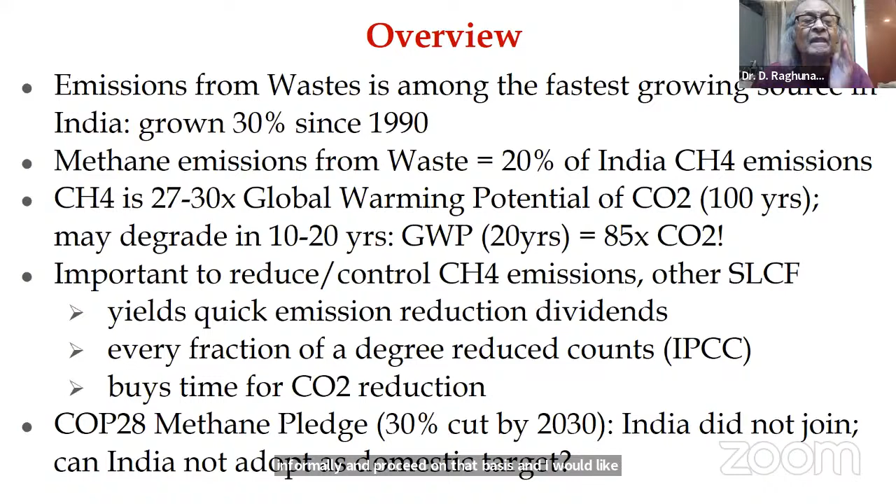So the broad status in India with regard to waste treatment is — and I think our panelists would agree with me — that currently waste handling and treatment is rather poor, is quite unregulated despite the existence of various rules and laws, and neglected, even in the large metros where there is some capacity investment. So the conditions in smaller towns and cities may well be imagined. Solid waste data is quite uncertain, there's some debate about these numbers, and it's probably an overestimate anyway, as stated, which government agencies tend to do. We are collecting roughly 70% of waste generated. Maybe 20% of that is being treated, and the rest simply lands in what are called landfills, but are really dumps in unhygienic conditions, polluting air as well as water through seepage, causing other health hazards through the emissions there. You can see the methane seeping out with flames coming out, etc.

The sewage treatment capacity is only about treating 19% of sewage generated. But if you look at capacity utilization, that's only about 72% or so. And therefore, the net amount comes to only about treating 13% or so of the sewage being generated. So much work is needed in the metros, and even more in the tier 2 and tier 3 towns.

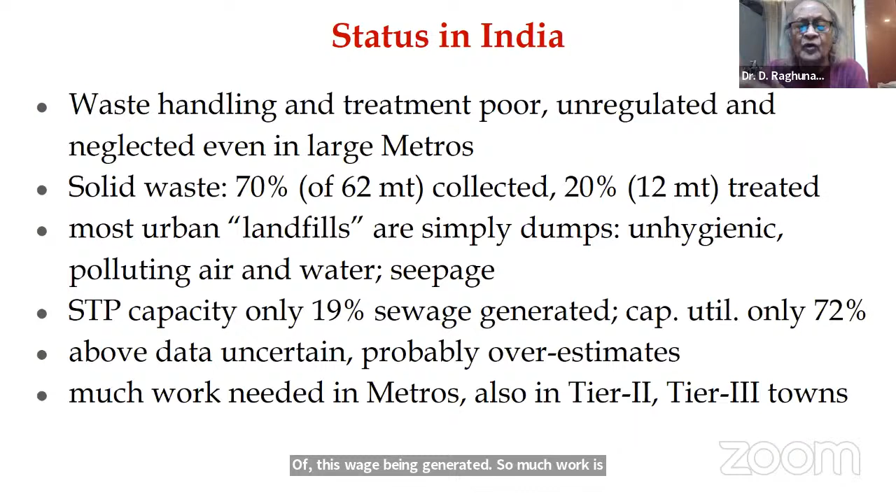So the issues, I think, are the technology used both in solid waste as well as in sewage treatment, I think, are quite outdated. They're very far from international standards.

We need to address this problem as a multidimensional approach. A common approach that we are following in our approach paper, etc., is we are looking at these issues as problems which can yield multiple benefits or co-benefits. Now, the co-benefit argument is it depends on your perspective, what you consider to be the main benefit and what you consider to be the co-benefit.

So it's very useful to think of maybe not benefits and co-benefits, but multiple benefits. Co-benefits are useful to think of in terms of how you convince people, how you motivate people, policymakers, the public, to join such programs, to support such programs. So a way of selling the problem of handling wastes, of treating waste, both solid and sewage, is that it will improve the urban environment, improve hygiene, help reduce pollution, improve public health, and as a side benefit, if you like, it also helps in reducing emissions. Because it may be difficult only to speak of emission reductions to public and policy planners.

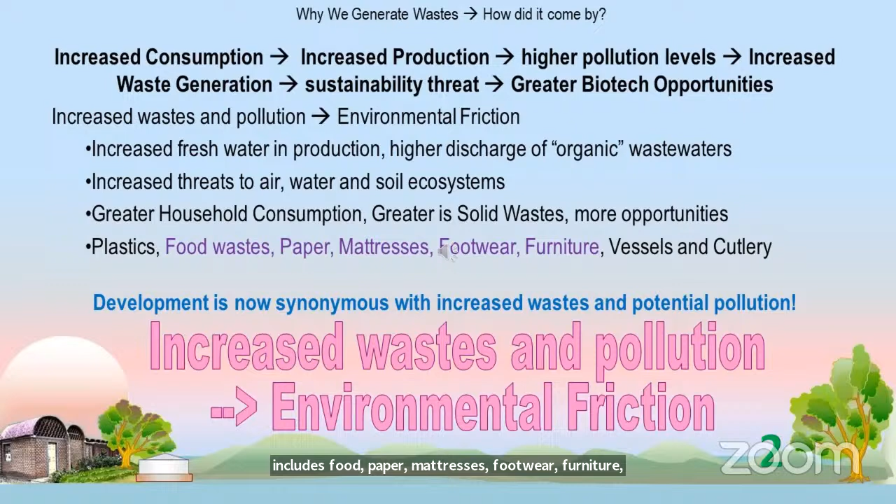In slide 3 here, we see as we have gradually developed and begun to implement our solid waste management rules, we began to collect the waste closer to the source of generation. As a result, what was normally not found in the street bins now have begun to appear. Most important here is to firstly notice that close to 75% of the waste is wet and organic, especially when you take the city as a whole, and definitely more when you take the market waste, street parks, hotels and eatery and residential waste. All of these contain a very large fraction of decomposable waste which was not there in the past.

Also, in a lot we find a lot more recyclable materials like metal cans, paper and plastic, cardboard, which were not there in the past. And this is something important. And since we collect them separately, the wet and the dry, it allows us to go in for a better way of recycling and reuse. And let me come back to this a little later.

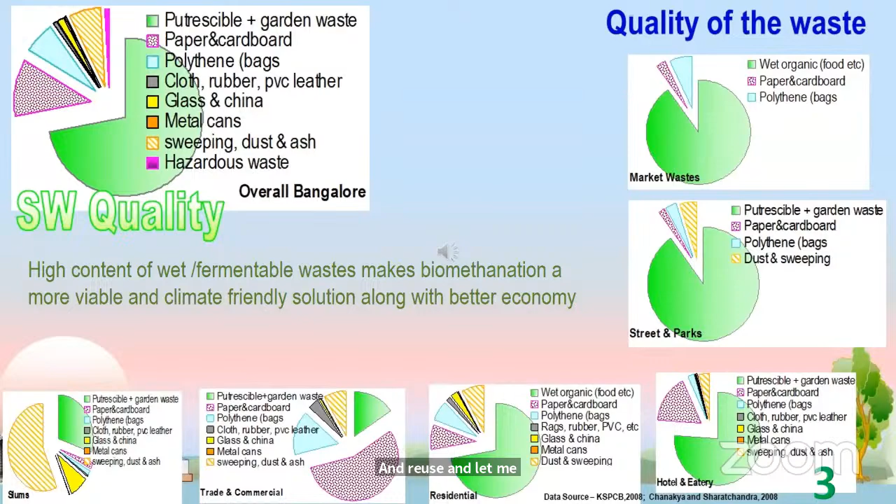Pointing out that the wastes were predominantly organic and fermentable leads us to the obvious question: do we compost or do we go in for biomethanation?

Biomethanation seems to be a lot more environment friendly, as one, the methane is not being released. Second, the methane is captured and replaces fossil fuels. More important is that it also retains most of the nutrients. There is very little loss of nitrogen.

Another important issue is to understand that biomethanation as a process for urban wet waste is not something new. Down here in Chennai, it has been tried for as much as 20 years now. But what is important is that these pilots have shown us that it is, as a process, quite stable and quite easy to handle. The bigger issue is how do I make it into a business deal.

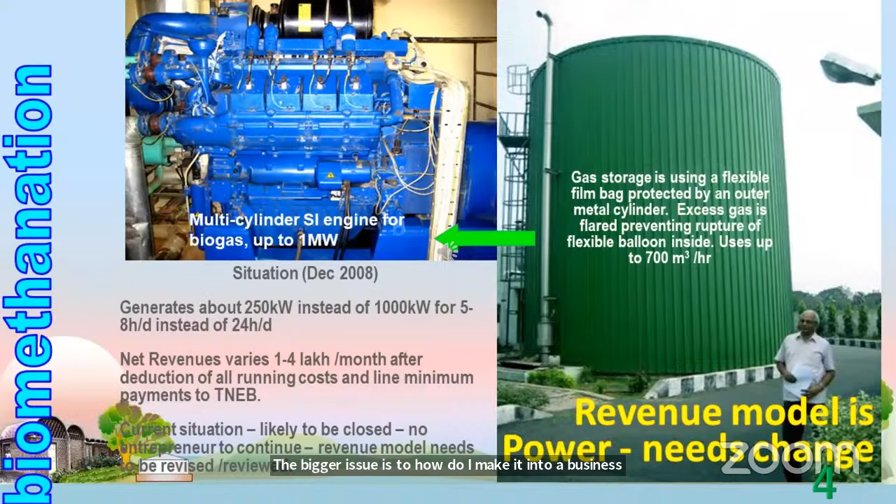I'll come back to the business part in the next slide, in slide 5, to reinforce the thought that the concept of biomethanation for urban solid waste has been with us for some time.

I'd like to show the example of the town of Siraguppa in Bellary district, which managed to treat all of its waste without using a landfill for over 10 years. All the wet waste it collected was subject to biomethanation. It generated power, and the residue was converted to vermicompost for its own gardens. The dry waste was almost completely recycled, and they were not using a landfill for quite some time. This was a model small town which won the best town prize for about 2-3 years in a row.

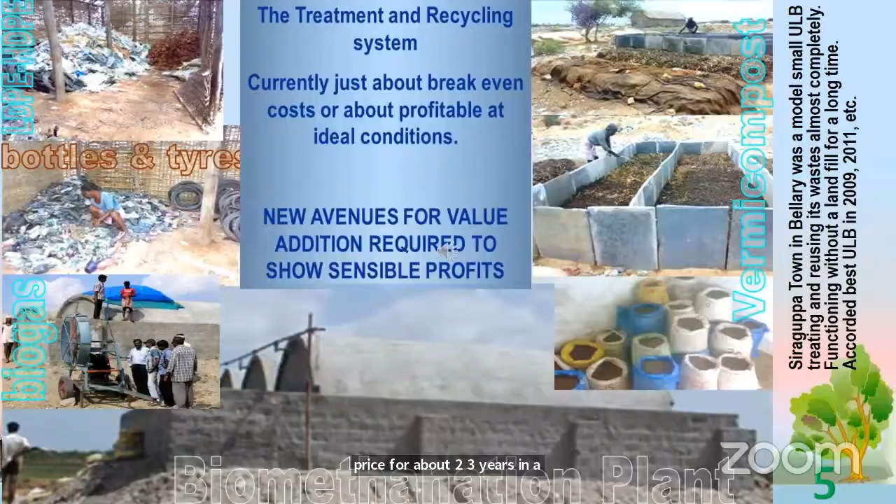Like this, the biomethanation of urban solid waste, which is really a wet mass with roughly 80 to 85% moisture, has seen many such starts. I call them false starts because they never turned into a business proposition. So now it's all set for the final dash, thanks to a large extent to policy support and market readiness the technologies have now achieved.

Very clearly, as you see in this slide, a ton of urban solid waste on the lower side would produce about 20 kgs of bio-CNG or CNG equivalent, about 50 kgs of compost, 700 liters of liquid fermented organic manure, and carbon dioxide, which is used for disinfestation. All these put together have today a market value close to 2,700 rupees. So per ton per day, this translates to about close to 10 lakhs per year. And the cost of a full-scale plant is about 20 lakhs per ton. So you can see that the payback period has really crashed now.

So the question is, are we all now ready to take this path with this kind of policy support? Very importantly, many of the progressive towns have already taken this route and are on the verge of becoming successful.

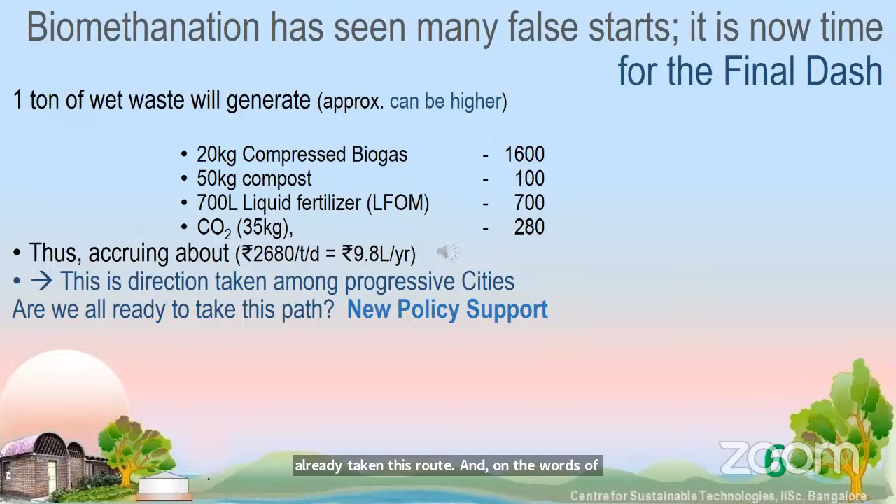Here in slide 7, I want to emphasize that the 4 outputs we saw in the previous slide are what is already marketable today. But depending on what is the main feedstock to these plants, or if you go to a next higher level where you segregate the wet waste even further into food, garden, plantation, etc., then the variety of byproducts that you can generate becomes much larger and manifold, and they can be reused for a variety of other value-added products.

From the digested residue, if it is predominantly leaves, then we can generate mushrooms. If it is banana leaves, then you can make fabric. If it is high lignin material, you can convert it to lignin formaldehyde, or use this material as a biofilm support for anaerobic reactors. The liquid has already been shown to have some pest repellent properties, but it can definitely be used in aquaculture or algal culture. And should it have a high lignin content, then you can also induce ligninase enzyme, which can be used for other purposes.

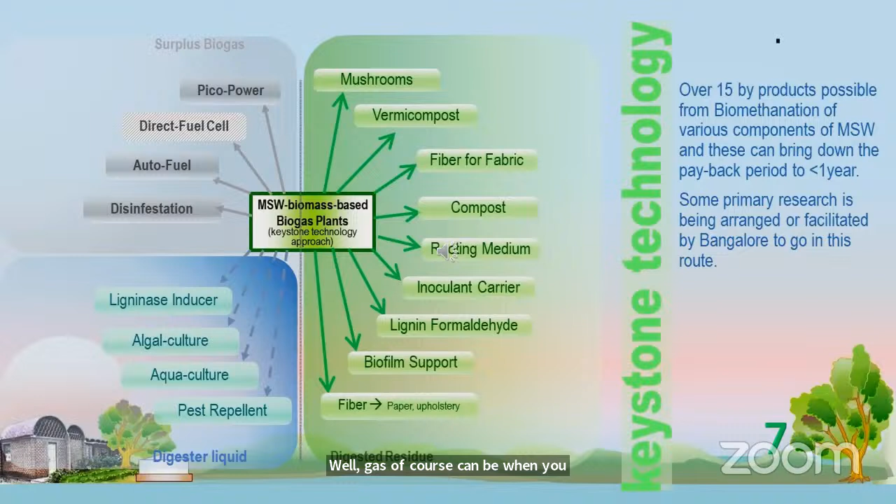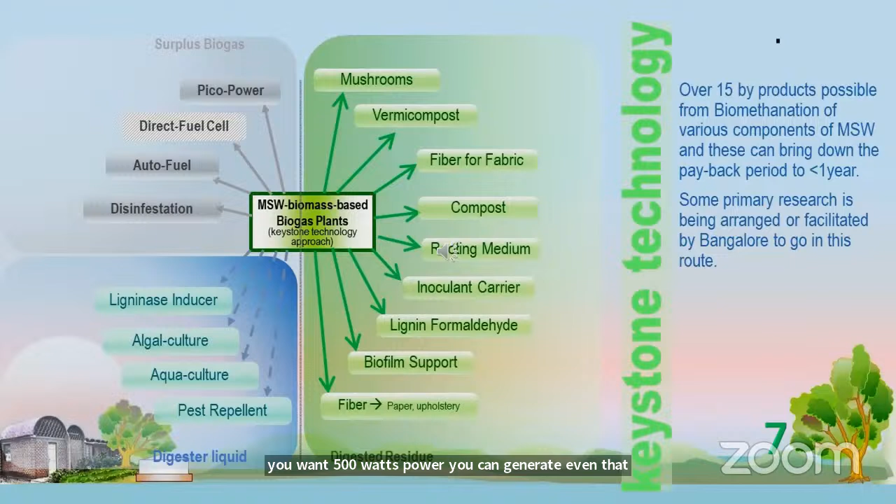Here in slide 7, I want to emphasize that although we are already looking at the byproducts, the gases, an interesting phenomenon has happened which I couldn't generate enough visuals on: as our lifestyle has changed, a lot more products are being generated from dry segregated waste, from thermocol, styrofoam, corrugated paper, multi-layered plastics, and different types of polyethylenes.

I just visited a startup making designer tiles from plastics for indoor use, which is much more attractive and adds more value, so per kg you get a lot more value. This is the change happening: products made from waste for multiple uses is an expanding area, and especially many startups have taken up this field.

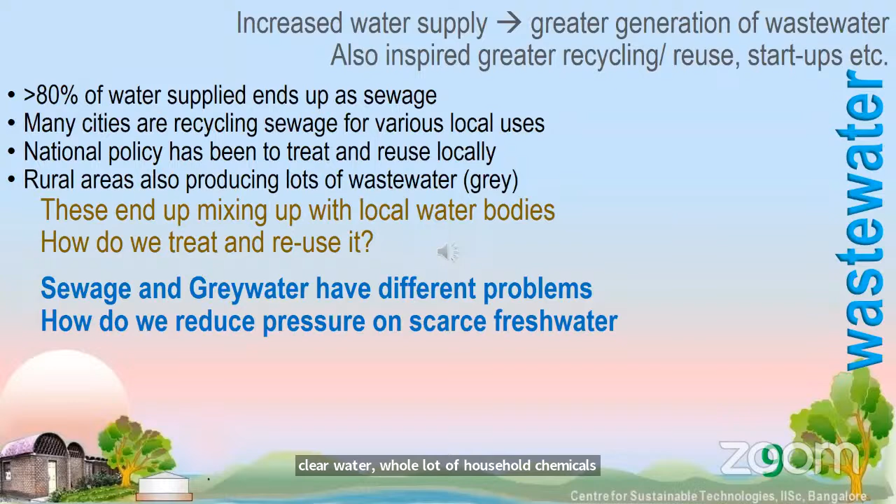The most important part is that what used to be a permanent drought-prone area for the last 15 years, with groundwater at 1,500 feet, now has water levels risen to 200 and 300 feet below ground. This kind of water is used for irrigation.

Chennai is also trying something similar, to improve water security, especially for drinking water security. Here it must be understood that each location will have a different set of problems to solve.

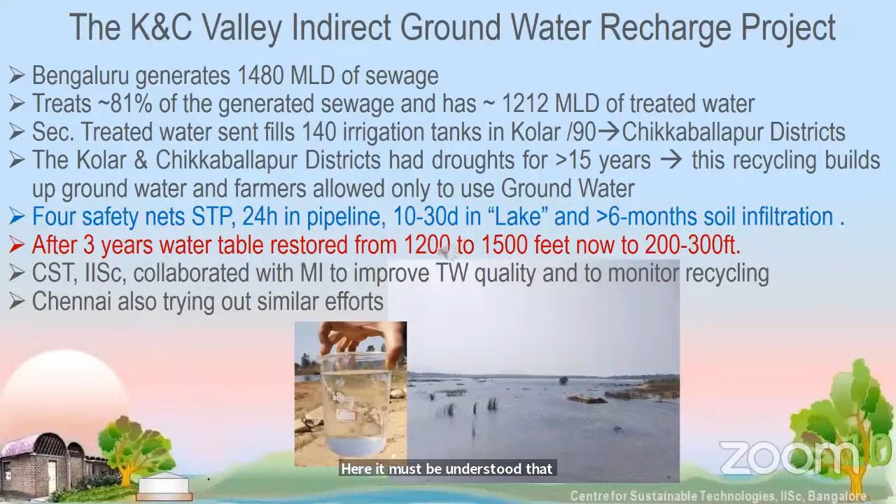In the last 5 years, the impact of droughts has been reversed, and land alienation, which was a very common phenomenon, has also been reversed. Horticulture has become back in vogue, and the area has become the tomato capital of the country. Out-migration has been reversed, and industrialization has started.

As you see in the pictures, the water tanks are almost always full throughout the year, and the water quality, as seen in various containers, is quite clear. This treated water has become a high value commodity for local people, and has also become an exemplar for a large part of the world, since this is one of the largest such systems in Asia, reaching a huge number of people, standing as an example for others to emulate.

Based on these successes, water recycling and reuse locally has become a very important aspect of various urban habitats. So much so that in a couple of cities, the concept of a waterfront, even in a semi-arid area, has become possible because recycled water has been brought back into local use. People are restoring local water bodies, sometimes merely for aesthetics, sometimes for creating bird habitats, and in Chennai and various places, water security has also been looked into.

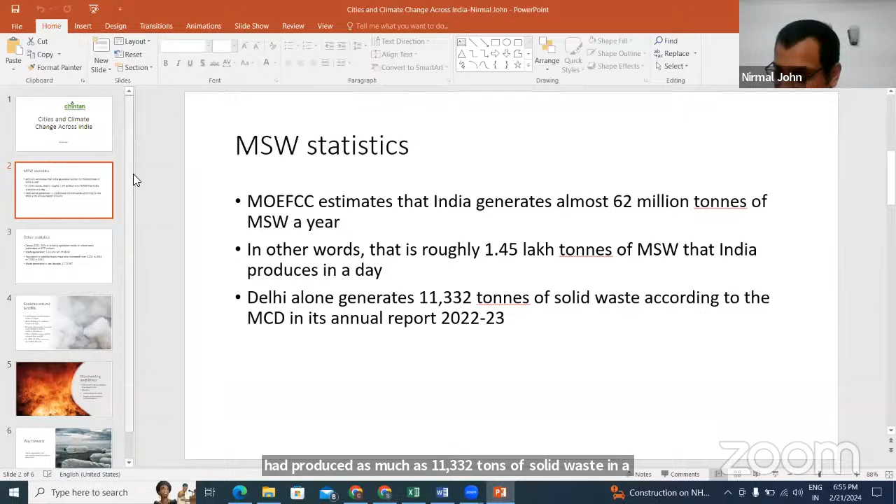Now, if you also look at the latest census, the 2011 census, what we also saw was that 31% of India's population resides in urban areas. Though that may seem relatively insignificant, that's about 377 million people residing in India's urban agglomerations, but they produce an estimated 1.45 lakh metric tons of municipal solid waste. Now, with the population figures likely rising, there's inevitably going to be an increase in the amount of municipal solid waste that urban areas generate each year or each day.

ULBs are vital here in this regard because they play a pivotal role in the management of municipal solid waste. They are also responsible for the implementation and monitoring of systems for urban service delivery, like maintenance of public toilets, but their primary focus is municipal solid waste. Then there was also the launch of the Swachh Bharat mission, which provides the basic infrastructure needed for access to sanitation facilities for every family.

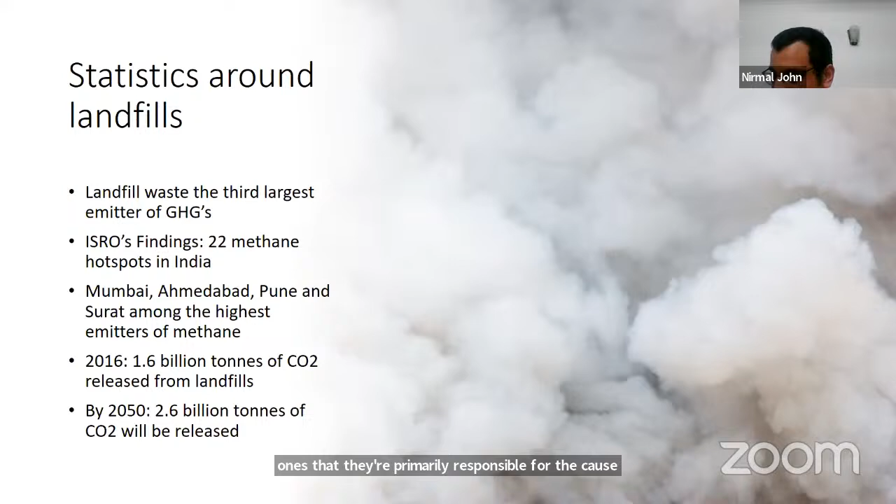Methane is particularly dangerous because it's primarily responsible for causing landfill fires, especially during summer seasons. We saw that happen in Kochi last year, and we also saw this happen at Delhi's Ghazipur landfill. But there is a way you can circumvent all this.

Studies have shown that you can reduce your greenhouse gas emissions by 6 to 8% if you're actively involved in reducing food waste. You can prevent food waste from going into landfills by either composting it or converting it into biogas, which is a cleaner alternative to fossil fuels.

Hence, waste segregation and subsequent composting of waste is vital, as it not only prevents the release of methane gas from landfills, but can also play a significant role in preventing the accumulation of waste in landfills.

I'll end by talking about the kind of work, among the many things we do at Chintan, we've also been very actively involved in the diversion of waste from landfills. We've been doing that through an MRF that was recently commissioned in February 2021. With support from the Municipal Corporation of Delhi, North Delhi, and funding from the Coca-Cola Foundation, we were able to set up a material recovery facility in Zakhira.

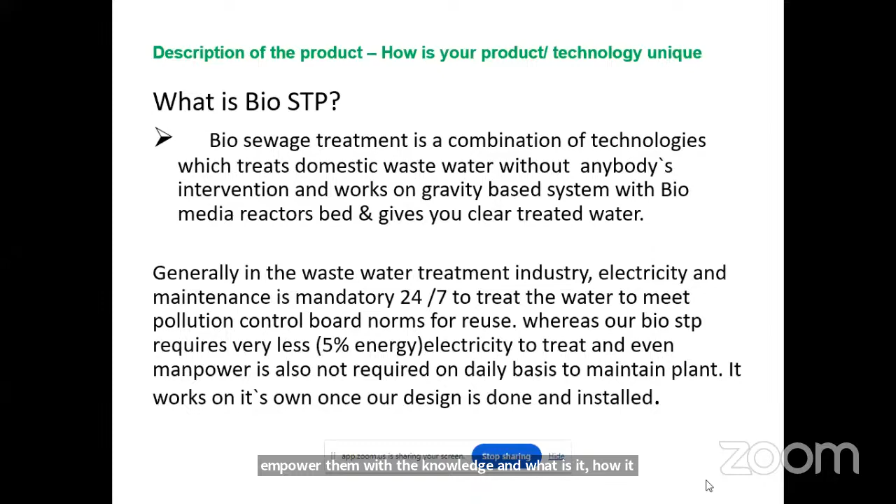That is when we developed this application. In this bio STP, the biggest advantage is we don't require operators at all. The entire plant runs on its own because 90% of the process happens with the media along with the gravity-based system. So from collection till the final treated water tank, it happens only by gravity. That means we don't require any operators to run the plant.

Number two, we were talking about methane emission and carbon footprint. Here the carbon footprint we save close to 90% because we don't use any pumps and motors at all. 90% of the plant treats only by microbes and enzymes, and only through media. The media life is also minimum 20 years, and that media you need not replace every year - 20 years is minimum, it can go beyond that also. That's the kind of media we will be providing. And it is almost like a fit and forget kind of treatment plant.

The biggest advantage here is when it comes to final tertiary treatment, why we are doing it - because even if it is a slight odor also, people are not willing to take that, they feel it is very offensive. That is where, to support them additionally, we are giving the final treatment process of ozonation, where it kills the entire microbes in the system and makes it 100% crystal clear, odorless water which can meet the pollution control board norms. And also you cannot even make a difference by seeing the water quality between RO and the sewage treated water - that is the kind of quality we deliver. Because we are using ozonation at the final stage, which can oxidize further and remove all the suspended solids and make it clear water.

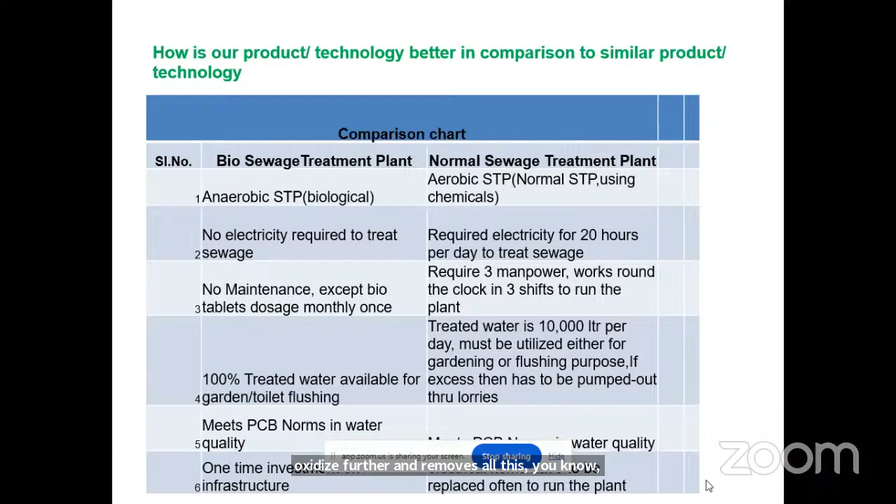The biggest outcome of the technology is, one, we can reuse this water, or leave it to the lake or river, or do underground recharge. And soil pollution, air pollution we can control, and we can save huge water by recycling this water. One is toilet flushing and gardening we are doing, but mainly I am exploring selling this recycled water. In the previous presentation, he was talking about it, but I am already on the job in Bangalore - today we got about 3 lakh liters of treated water they require.

They are willing to pay for both transport and the cost. For 6,000 liters, they are willing to pay about 350 rupees. We have finalized today, about the next 4 days, he needs about 3.5 lakh liters of water. And we have 100 KL plant in Bangalore.

We tied up both the parties, and now the vehicle is ready. One is they are earning the money, whoever has put up the plant. And the other thing, the person who is buying is actually in the construction industry. He is buying this water for soil excavation, for leveling of the soil, and also for construction purposes. In that case, imagine 3.5 lakh liters.

If he buys fresh water, how much cost does he have to incur? Number one. Number two, now in this summer they are not able to get the water at all. That is where the demand for treated wastewater has come up now, and we're getting lots of inquiries. Our focus is, whatever water you treat, when it's meeting the parameter, that water has definitely got a usage for industrial purposes, and also gardening and agriculture.

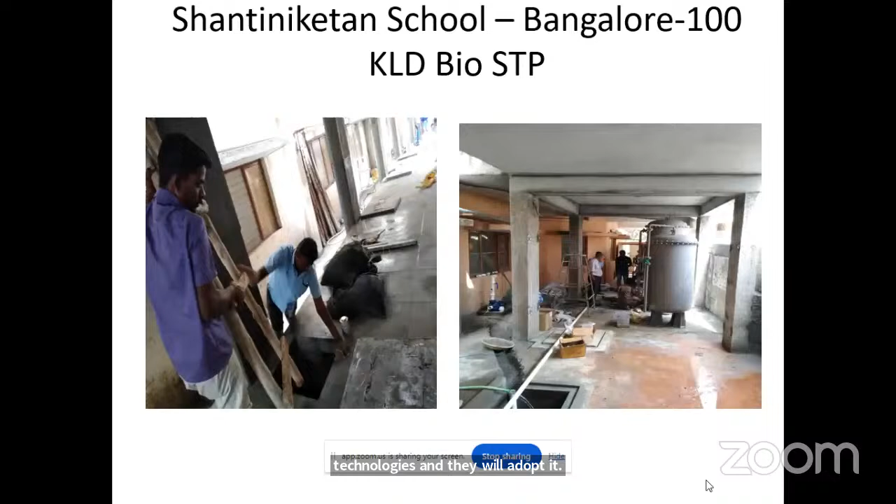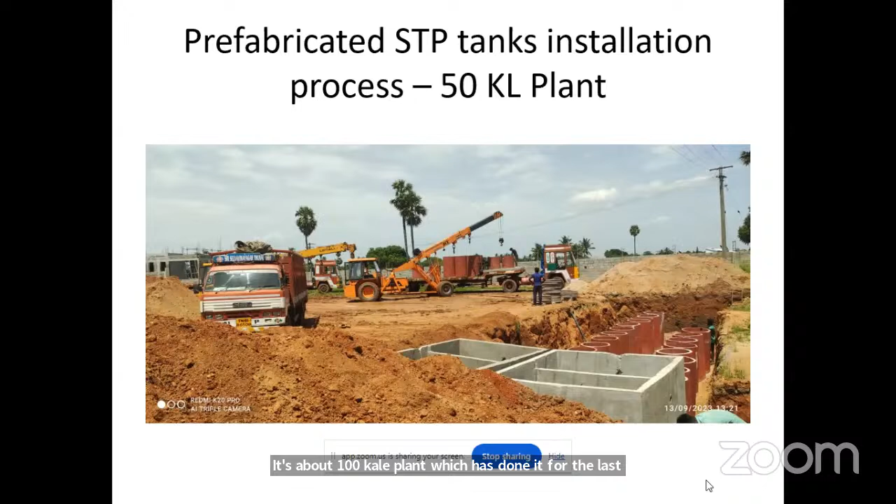And the successful projects I just wanted to showcase to you. This is in Shantiniketan in Bangalore, about a 100 KL plant which is running for the last 5 years. And this is another project where we have done a 50 KL plant for the Star Hotel. And this is a Hosur SIPCOT project, 55 KL plant running for the last 1.5 years. And this is the treated water quality.

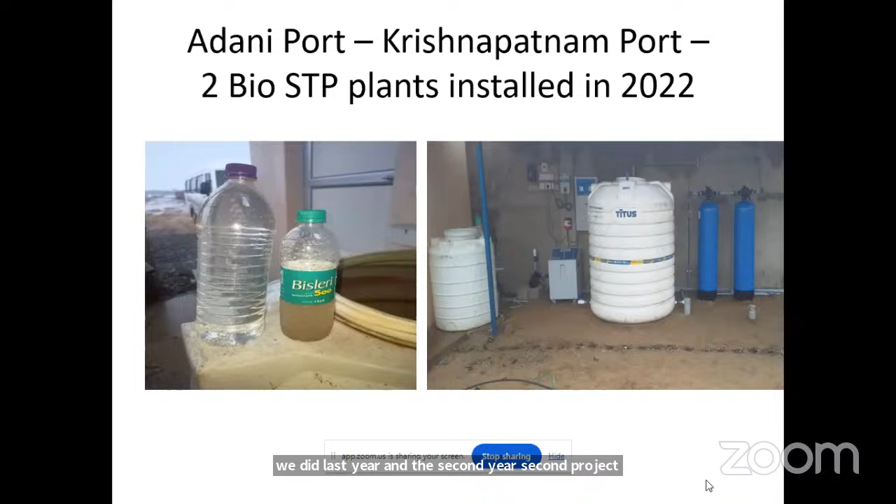And here it is actually Adani Port in Nellore we have done. One project we did last year, and the second project also we executed. That shows how happy the customer is. And this is Tamil Nadu Golf Federation, on Mount Road, we have done.

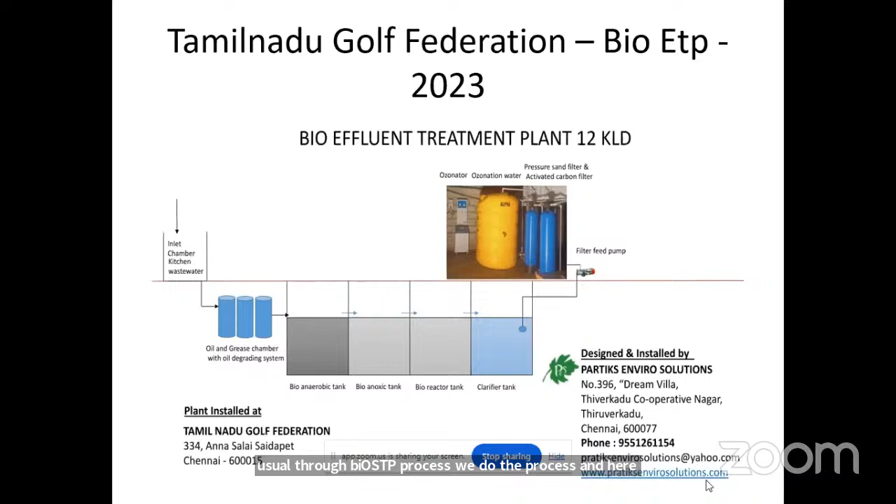Here, the beautiful thing I have done is, well, when it comes to ETP, effluent treatment plants, you will have more contamination due to oil and grease. That is where we have applied one more application where we use oil cakes, which are actually colonies of bacteria that can degrade the oil in the chamber itself before letting out to the collection tank. From there, as usual, through the bio-STP process, we do the treatment. And here it is also running very well. Anybody, if they want, can visit and take the feedback also. And this is the quality I said.

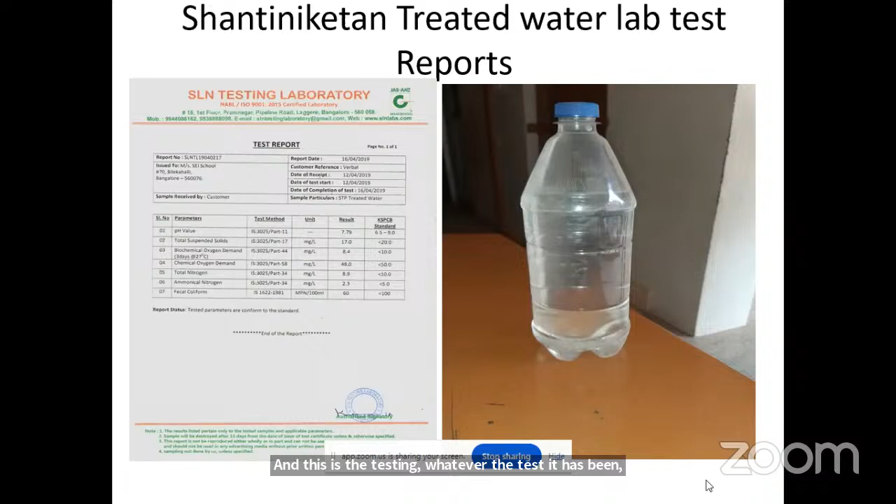And this is the testing, whatever test has been done. It is long back, from 2019, but I'll give you the latest, which we have done for the collector office, Tiruvallur collector office reports. I will show it to you.

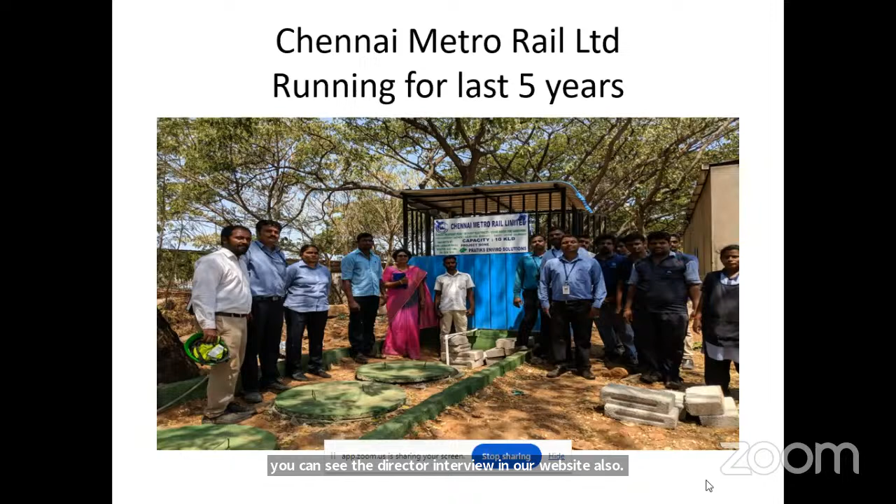And this is in Chennai Metro Rail. We did this in 2017. You can see the director's interview on our website also, his testimonial on our website on the front page itself. It is a sustainability project which we executed.

Only smaller apartments have a little bit of gardening space. Wherever you talk about 5 houses, 6 houses, they will never have a garden space. So in that case, where do they let out the treated water? That is the challenge. Everywhere we go, they are willing to invest money for the STPs, but they don't have an option for disposal of the treated water.

We got an application wherein partially 70 to 80% of the water is evaporated in the subsoil surface itself, and the remaining 20-30% they can reuse if they want. Basis on the soil type, the topography, and the soil reports, we do an analysis, and based on that we give the system to them, whatever has to be implemented for that particular project.

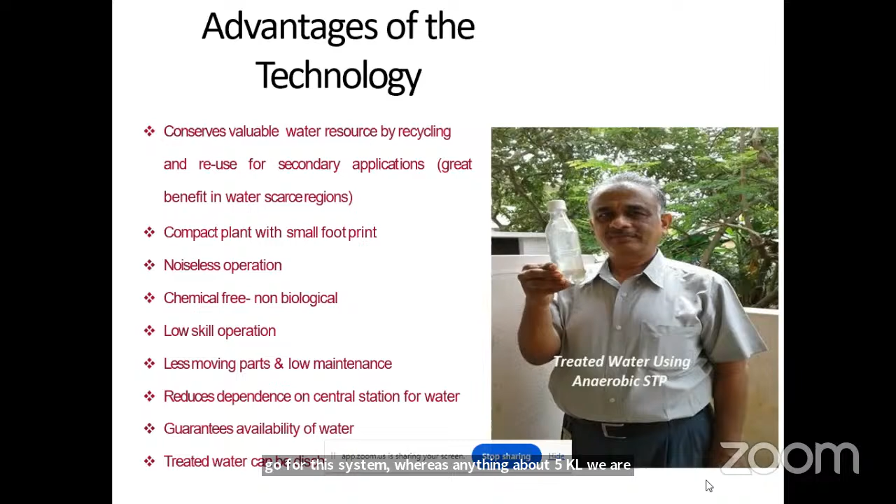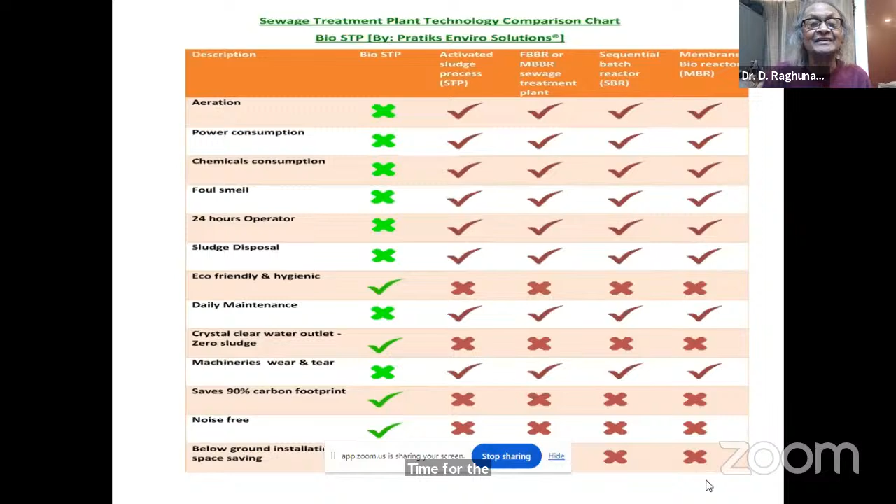This is the comparison chart, you can go through it. Maybe all these test reports and all, we can share it later also.

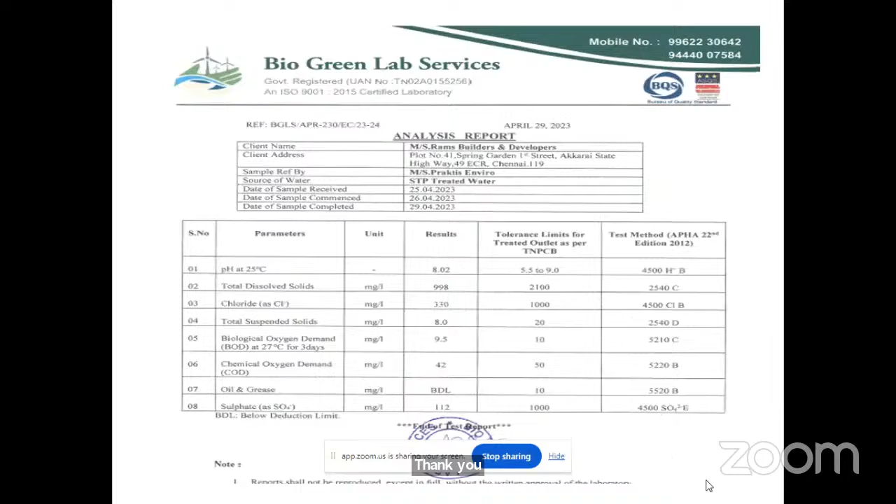This video, would you like to play it, or is it okay? We can play it later, sir, it's just about a 1 minute video only. We can play it later ma'am, if that's okay. Yeah, not a problem sir.

Not a problem. So I am through with my presentation. If anything is related to sewage, I'm open for questions and answers.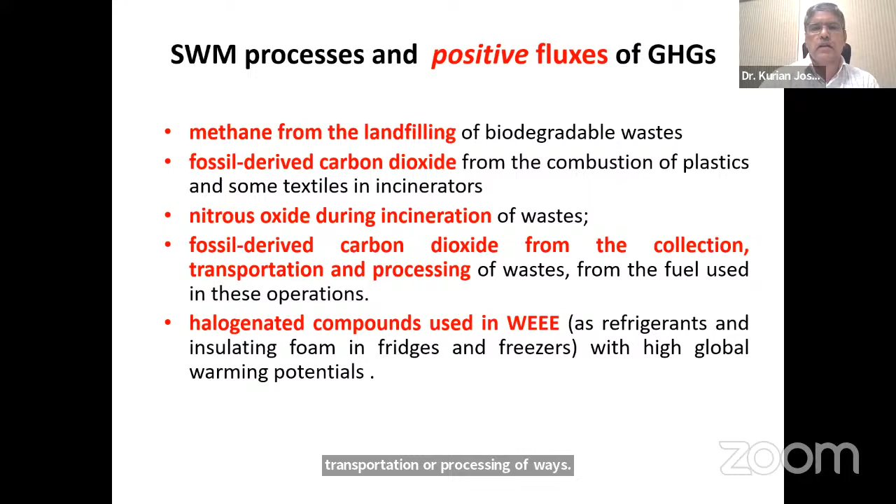It starts with emission of methane, which comes from the biodegradable waste we dump. It is also connected with the burning of plastic, similar to burning fossil fuel, because the origin of plastic is fossil fuel itself. There's nitrous oxide from combustion processes, and carbon dioxide emitted when we burn or use fuel for transportation or processing of waste, especially electronic waste. There are also other types of greenhouse gases.

Now, solid waste processing also has negative fluxes, meaning it can help address climate change in terms of the energy we could recover from these processes to replace energy from fossil fuel-based sources. Recycling of waste limits the need for producing new materials, which is energy intensive. So there's energy efficiency in material recovery and reducing, and also the use of compost, which is an excellent additive to enhance soil carbon and carbon storage. The carbon in compost, if incorporated into the soil, is a long way of storing carbon.

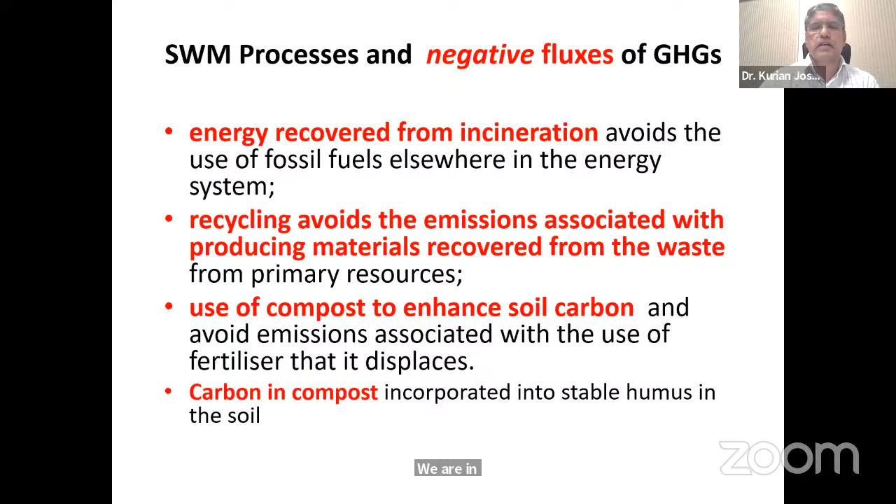Because the carbon from the atmosphere is fixed in biological materials, and that we compost and put it back, we are in a way capturing carbon from the atmosphere and storing it in the soil. So there are positive and negative connections.

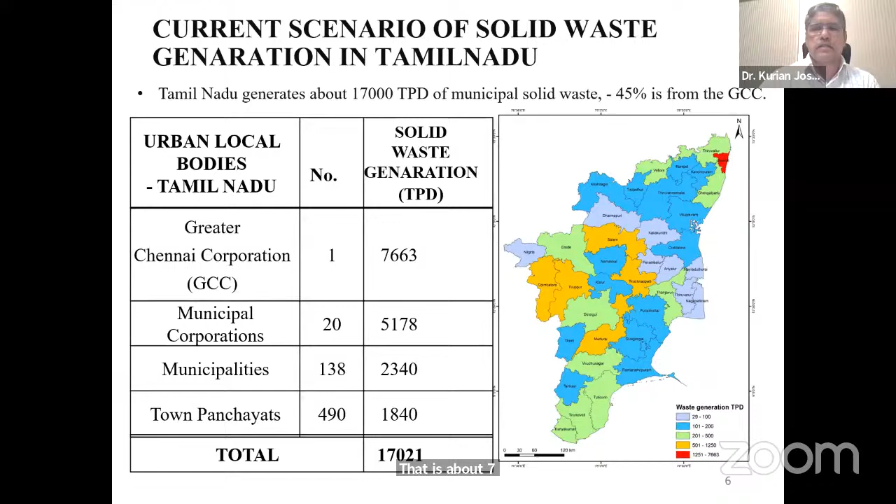When it comes to the waste generation scenario in Tamil Nadu, we have done a recent assessment which tells us that about 17,000 tons of municipal solid waste is generated in Tamil Nadu, of which almost 45% is from Chennai, that is about 7,600 tons every day. Of these 7,600 tons, in terms of wet waste processing, about 1,000 tons get processed in micro-composting centers, bio-CNG plants, green waste or garden waste processing, and small biogas plants. About 800 tons of dry waste also gets recycled or diverted by recycling facilities or waste-to-energy facilities.

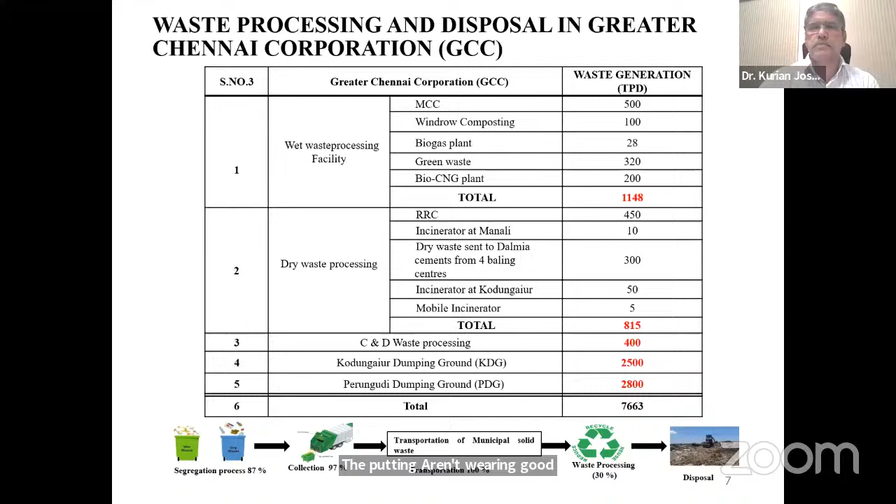But still, we have about 5,000 plus tons of waste getting dumped at two dump sites, the Kodungaiur and Perungudi dump sites, which on average receive about 2,000 plus tons of waste every day. And if you look at the quality of the waste that gets dumped after diversions, as already indicated, almost 50% of it is biodegradable waste.

And if biodegradable waste is getting dumped, we know methane emission is a possibility. We have done an estimate, and our estimate says that every day about 150 tons of methane is emitted from the different dump sites.

So how do we deal with this waste that is getting dumped is the basic question. Of course, for biodegradable waste, there are only two routes possible. For easily biodegradable waste, we should take the biomethanation route or the bio-CNG route, and the rest of the waste should take the composting route. That is the model Tamil Nadu is following.

To the extent possible, this should happen as close to the source of the waste as possible. So the model followed for composting and biomethanation should happen in a decentralized manner, the approach which Ms. Dakshayani was talking about for liquid waste. And when it comes to recyclables, part of it is combustible, and to the extent possible, we should try to recycle.

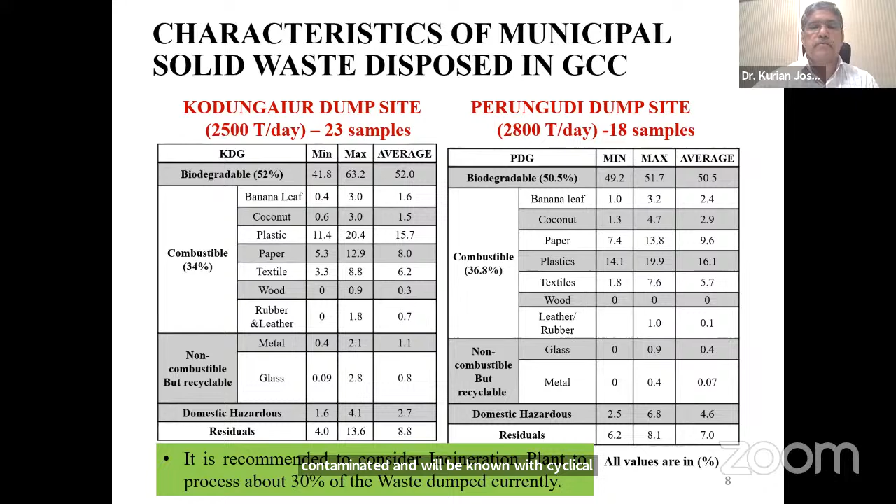Our studies show that about 30% of this combustible waste will be contaminated and non-recyclable combustible waste, for which we should also have a waste to energy facility. So if we have this integrated approach, a waste management solution will emerge.

In Chennai's context, the waste quantity has increased, but there are also several initiatives which the city corporation is doing. It starts with waste segregation promotion. Almost 95% of waste collection up to door-to-door level is happening.

There is also a great effort initiated in the past 1.5 years with reference to promoting waste segregation, and to minimize greenhouse gas emissions during collection and transport, the collection vehicles have been fully made battery operated. So that is one initiative.

There are about 5,000 plus battery operated vehicles used for door-to-door collection. The transport vehicles have also been renovated with BS6 compliance and fuel efficiency, which contributes to significant reduction in greenhouse gases.

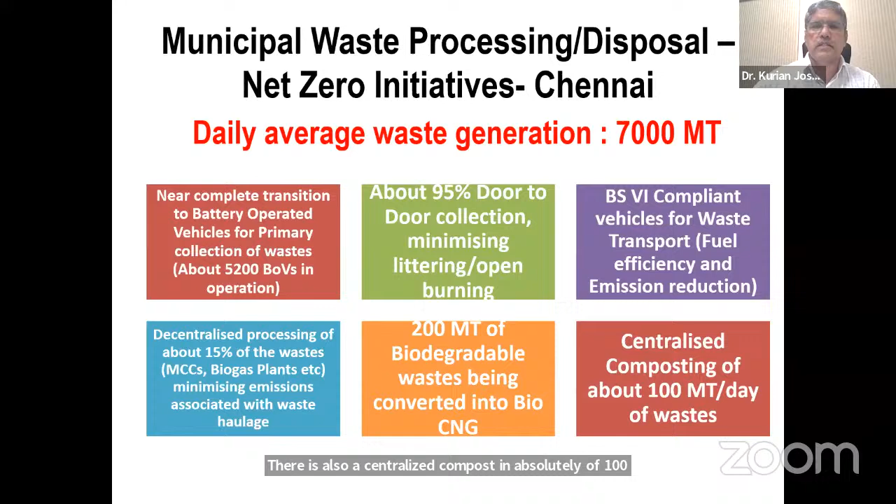But this is not enough to deal with the 7,000 tons of waste that we are generating. So there are several projects in the pipeline, including additional capacity for biomethanation, additional capacity for MCCs (micro-composting centers), increasing the resource recovery centers, and also the C&D waste and garden waste.

This itself accounts for about 1,000 tons per day. So there are two C&D waste processing facilities and two garden waste processing facilities, and this is diverting about 1,000 tons of waste per day.

Chennai, and not only Chennai but almost all the urban local bodies of Tamil Nadu, is very active with reference to dealing with dump sites, remediating them through the biomining process. In Chennai, out of the two dump sites, at Perungudi, the process is already nearing completion with reference to biomining of 32 lakh cubic meters of legacy waste.

And at Kodungaiur, the biomining process is also going to start, by which about 68 lakh tons of legacy waste will be recovered and processed. It will be either reclaimed as bio-soil or inerts, and the RDF, which could substitute the fuel requirements in cement plants.

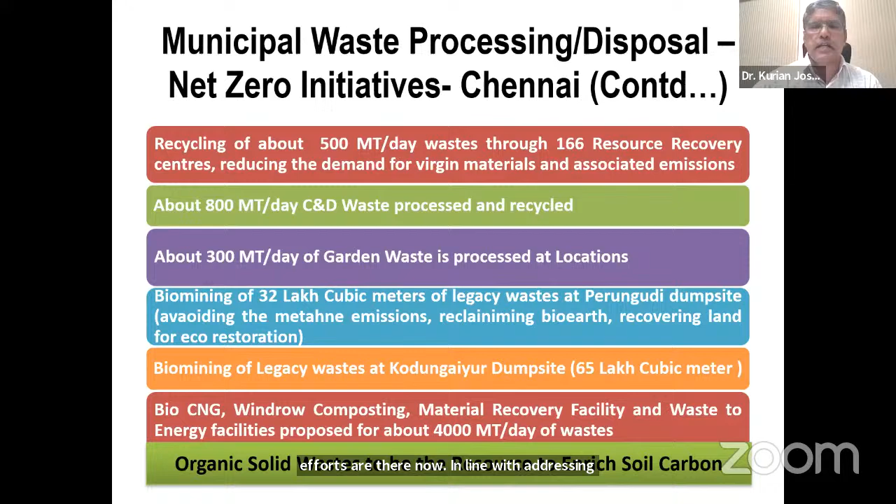So to a great extent, we can say that efforts are there now in line with addressing solid waste, but it requires the support of different stakeholders, including all of us who are the generators of waste, who have to also support the waste management facilities, especially by segregating the waste.

This is one of the bio-CNG plants which was set up one year back, which is operating very well in terms of processing 100 metric tons of biodegradable waste, and the bio-CNG that is generated is bottled and sold.

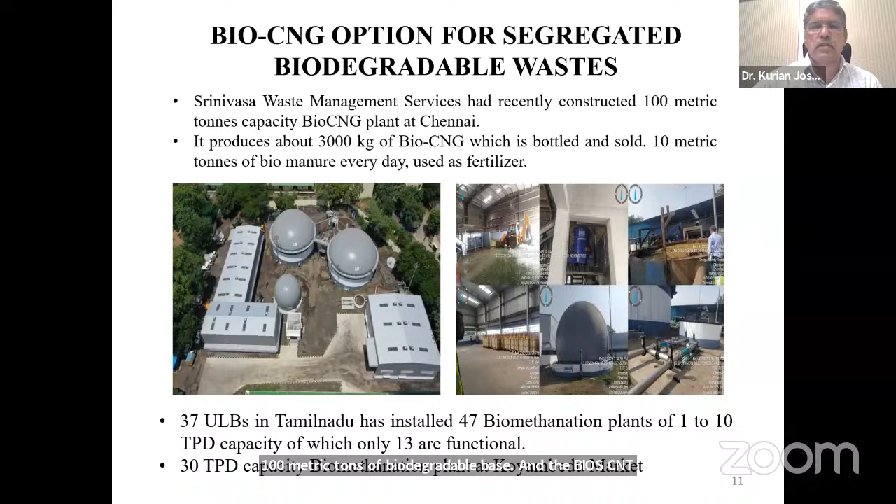We have also done an analysis in terms of the waste to energy facilities and how they could be located, where they need to be located. This was a study undertaken on behalf of the State Department of Environment, where we have suggested centralized waste to energy facilities, regional waste to energy facilities to come up in at least 5 locations of the state.

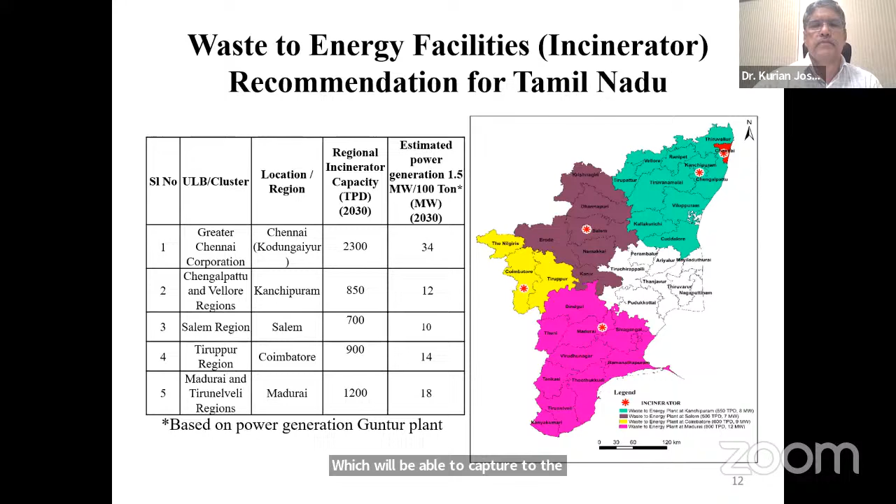These facilities will be able to cater to the non-recyclable combustible fraction of the waste, by which we could also recover the energy. So to summarize, I will say that waste processing or waste management is not just a technology issue.

Very often where we fail is in terms of this integrated approach. Very often we focus on one element or the other. It has got different elements: waste reduction, segregation, storage, collection, transport, processing, and residue disposal. And that involves at least these 7 M's.

The material aspect means the waste, and if you have to manage the waste, you require land and also energy. The products of waste processing or the residues also need to be taken care of. And of course, the public and other people associated should have the right mentality to collaborate, especially in terms of minimizing and segregating waste, and paying for waste management.

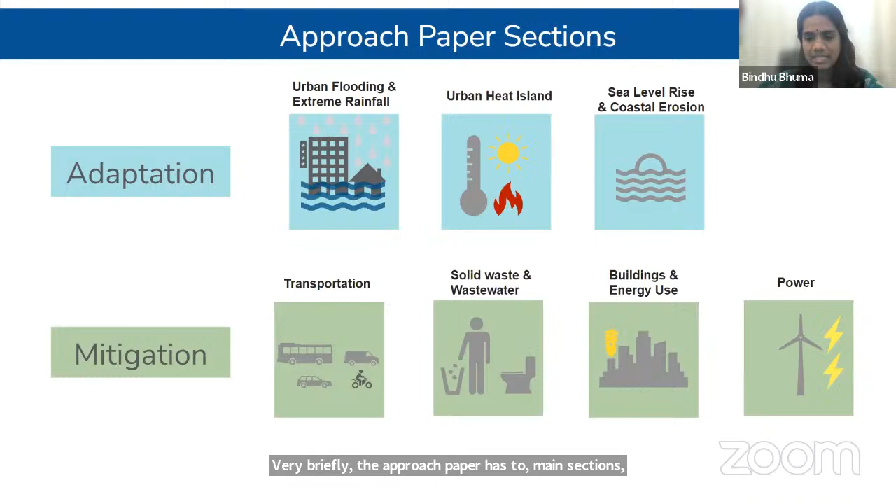Briefly, the approach paper has two main sections: adaptation and mitigation, as you can see in this slide. Today we will specifically be focusing on solid waste and sewage.

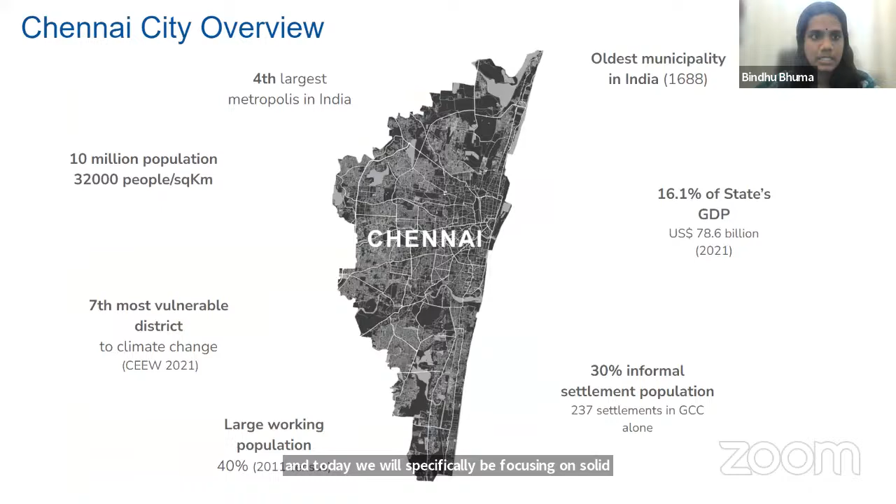I am going to jump straight into the issues around Chennai's waste management. We've highlighted around 6 main issues, and the first one is its highest waste generation. Chennai generates approximately 0.75 kg of solid waste per capita, which is one of the highest in the country. The waste sector in the city is the third largest source of emissions - 13% of Chennai's emissions are from solid waste and sewage, which accounts to 1.9 million tons carbon dioxide equivalent.

Secondly, the issue we want to focus on is the lack of efficient source segregation. I think this is the key issue, the loophole or gap in the waste management system of Chennai. There is absolute inadequacy in source segregation and collection. A lot of efforts are being taken, but it's all happening in bits and pieces - there is no chain of events happening to make it more efficient. When we look at what percentage of households are really segregating waste at source, there isn't much awareness, and not every part of Chennai is doing it.

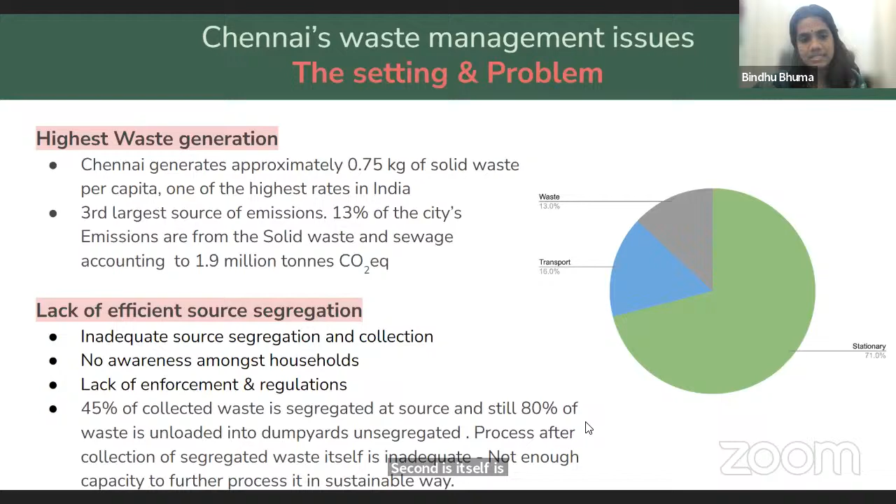I think this is also because of lack of enforcement and regulations to segregate waste at a household level. For example, 45% of collected waste is segregated at source, yet still 80% of waste is unloaded into the dump yards unsegregated. So even the segregated waste is again being dumped back unsegregated, because there is not enough capacity. The process after collection of segregated waste itself is inadequate, with not enough capacity to further process it in a sustainable way.

Thirdly, I think we have to speak about the unscientific dump yards. The city has two main dump yards, one at the north and one at the south, the Kodungaiyur dump yard and the Perungudi dump yard, which are currently just mere dumps that are very unhygienic and causing air pollution, contaminating the nearby water bodies and the soil.

These are two mountains of legacy waste amounting to a total of 94 lakh cubic meters that has been accumulated, and these are such enormous sources of methane in the city. Various research and studies have found that municipal solid dump sites release 60% methane, 40% carbon dioxide, and traces of other harmful gases like ozone, nitrous oxide, and perfluorocarbons.

Lately the city corporation has been taking steps in order to make these dump yards into more scientific landfills. For example, we did see in the previous presentation by Kurian sir on lines of biomining that is happening in the two dump sites, and I think it is a good way forward.

The next issue we want to focus on is the insufficient recycling capacity. Although the CCAP states that there is 20% waste that is being segregated and recycled, there are so many reports that say only 4% of it is actually being recycled. So lack of decentralized recycling centers and in general lack of capacity to recycle is something hard hitting for the city in these times.

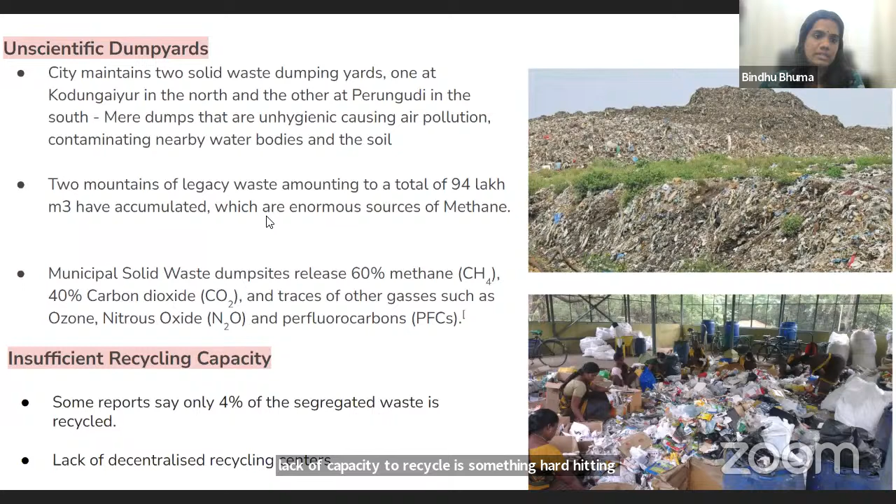And a very important issue that is in fact underestimated is the underused potential of wastewater reuse. I think we've had a wonderful presentation earlier from Dr. Dakshayani, and 75% of the city's daily water supply turns into sewage. That is a humongous amount of potential treated water that is just going into the sewage.

Close to 30% of untreated sewage is discharged directly into drains, canals, and even the rivers, which again run through the entire city. We also have the issue of inefficient sewerage networks. The chain of the sewage transportation is not continuous, and sometimes it is too long. I think it is important to realize that emissions from wastewater are a major underestimation in the Chennai Climate Action Plan.

If you look at the graph on the right, we can see that the solid waste accounts up to 13% of the city's emissions, and the wastewater accounts to only 1%. We feel that it's not very convincing because studies from NatCom have concluded that methane emissions from domestic and commercial wastewater are substantially much higher than what solid waste produces. So this looks like some serious issue of not considering the real methane emissions from wastewater, so that's something that needs addressing.

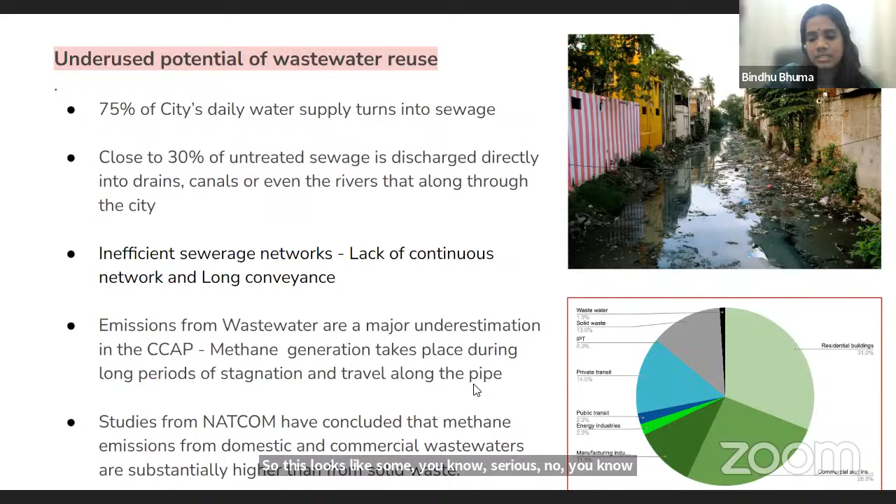We then move on to potential solutions. Well, obviously, we start off with effective source segregation. We're talking about 100% source collection and segregation, which is the key to efficient waste management. There need to be more IEC campaigns for household level segregation, and like I mentioned, we need to have strong enforcement and regulations from local governments, in the form of incentives or even penalties, like how some neighboring cities are doing.

Another important point that we wanted to bring forward was that in the official CCAP, they have proposed 100% home-based composting. While 100% segregating is possible, 100% home-based composting looks a little impractical. Not everybody would have the time to do it, or the area to do it, or the knowledge to do it. So that looked a little impractical on the document.

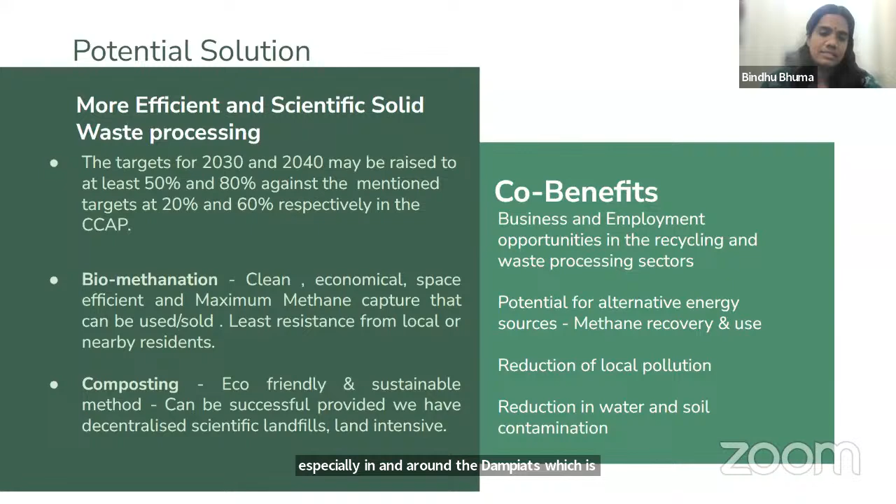Thirdly, reduction of local pollution. I think this could even be a direct benefit of it. And fourth is the reduction in water and soil contamination, especially in and around the dump yards, which is currently a very big issue. This could be avoided considering we move to a more efficient and scientific solid waste processing.

Another solution is to focus on scientific landfills. Like I said, the transition from being mere dump yards to scientific landfills with methane recovery should be the way forward. Biomining is one thing that is happening in Chennai with a lot of methane recovery, resulting in more hygienic surroundings.

So the benefits would be better livability, redefining the nature of dump yards itself. That's the potential of scientific landfills, especially since people living around even 3 kilometers around the dump yards are facing problems of foul smell, and air pollution is greater in these areas. I think all of these could be addressed by having scientific landfills.

And we also have heard about landfill parks. The potential to be recreational areas after the digestion of waste is also another co-benefit that we thought of. So the next potential solution is wastewater treatment, recycling, and reuse.

I think we've seen such great examples in our previous presentations on this. It is again something that is so fundamental to address, but sadly we are not doing this at a larger scale. And there needs to be zero discharge of untreated sewage into the water bodies. That is something very unacceptable.

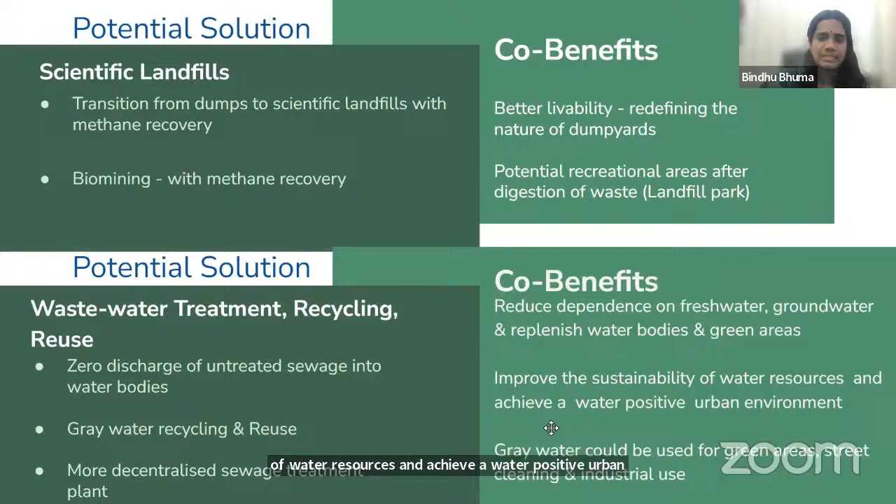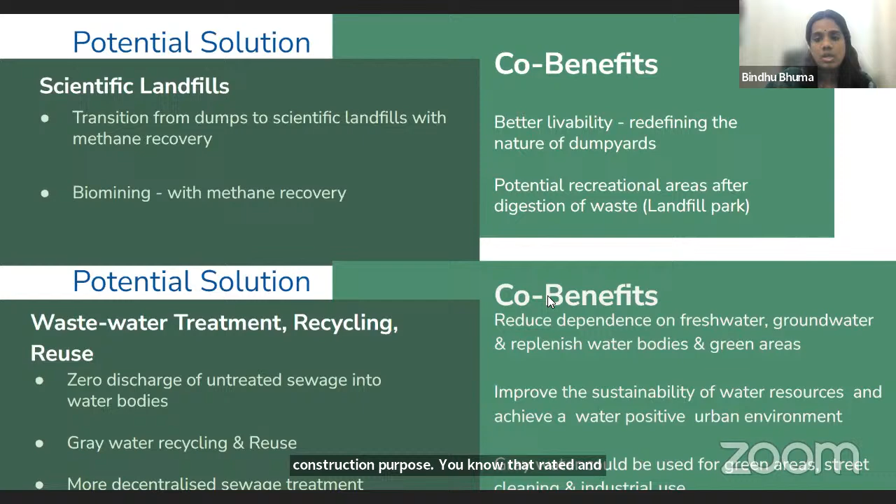And lastly, the resulting grey water could be used for green areas, for street cleaning, and for industrial purposes. I think we've had an example of how even for construction purposes, the treated grey water could be used. So a great way to go forward.

I think I literally ran through the presentation because of the time crunch. In conclusion, we would strongly advocate for the decentralization of solid waste and sewage treatment and the affiliated processes, especially in order to promote more efficient collection, segregation, and processing. With that, I would like to conclude the presentation.

Thank you. Great, excellent presentation. Thank you, Bindhu. We've come to the end of all the presentations. We started about 10 minutes late, so I think we can take 10 or 15 minutes more for the discussion, and then we would be within our overall time frame.

In the chat box, there was one question that stood out to me, about whether there is sufficient scope for business models. There were two parts to the question raised by Mr. Atul: one, are there business models there? I think both Professor Chanakya and Dr. Kirani have addressed this issue, so I don't think we need to discuss that further.